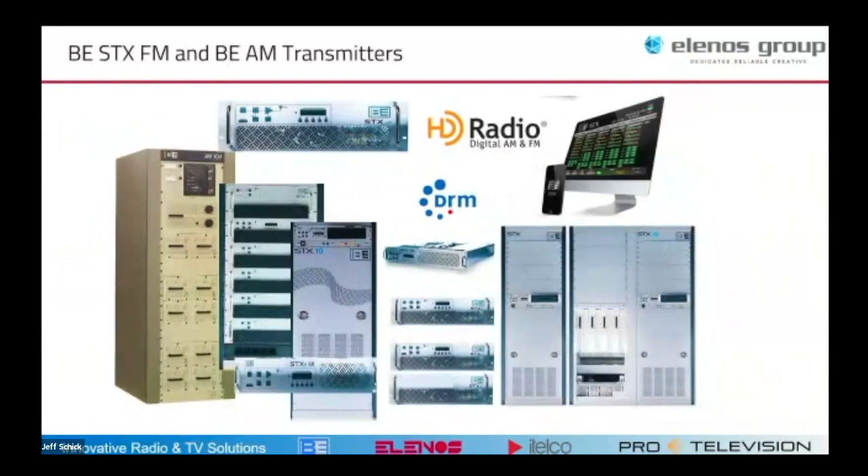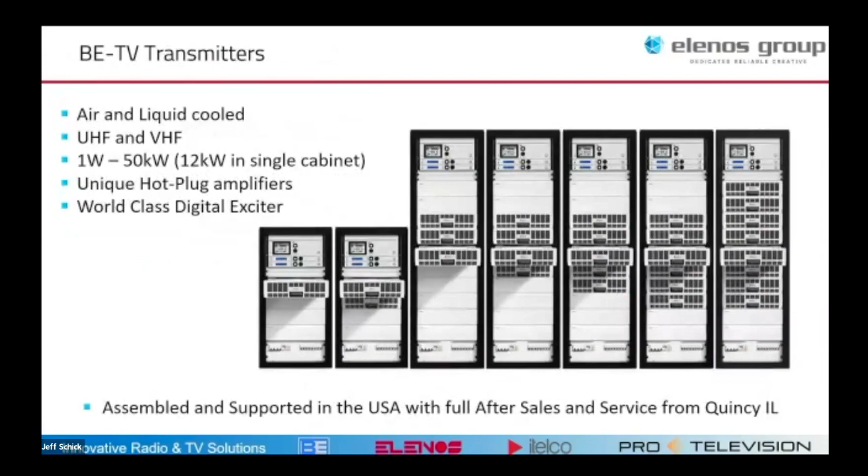So, BE product line, like I mentioned, AM, FM, and now TV transmitters made in Quincy, Illinois, and Audio Vault and other software products. We have News Boss, a product called the Radio Experience for data management. And then we've had some good success here in the U.S. with the compact Elenos line of radio transmitters. So everything from about 20 watts up to 30 kilowatts in more of a compact type architecture. And then TV transmitters, both air and liquid cooled, from 1 watt to 50 kilowatts. So really a pretty broad set of transmitters.

So the product we're going to talk about today is one we've called Quick Block. But before we really talk about the product, I kind of want to talk about transmitters in general, because over probably the past 30 years, as we've migrated from tube transmitters, solid state transmitters have kind of gone in two directions. Either there's a compact transmitter, you almost think of it as a big exciter. At some point, FM exciters were 10 or 20 watts, and now you might get a box that has the exciter in it, but it may have 1 or 2 or 3 or 5 or 10 kilowatts worth of amplification all in the same box. So that's kind of this mode of compact transmitters.

And then there are modular transmitters. So these tended to be bigger transmitters. You may have hot pluggable power supplies, hot pluggable RF amplifiers. For sure, there's an exciter. It might be a module or a 2RU box. And each of them have benefits. The compact transmitters generally are pretty efficient. They fit in a small space. They're cost effective, operate with pretty good efficiency.

But there are some drawbacks of them. And the modular transmitters, well, the great news is it's easy to swap out parts. And if you have a soft failure because one little piece fails, you're still going, but at reduced power. There's a number of other points. But generally, when we looked at Quick Block, we tried to say, what are the good things that our small transmitters are great for?

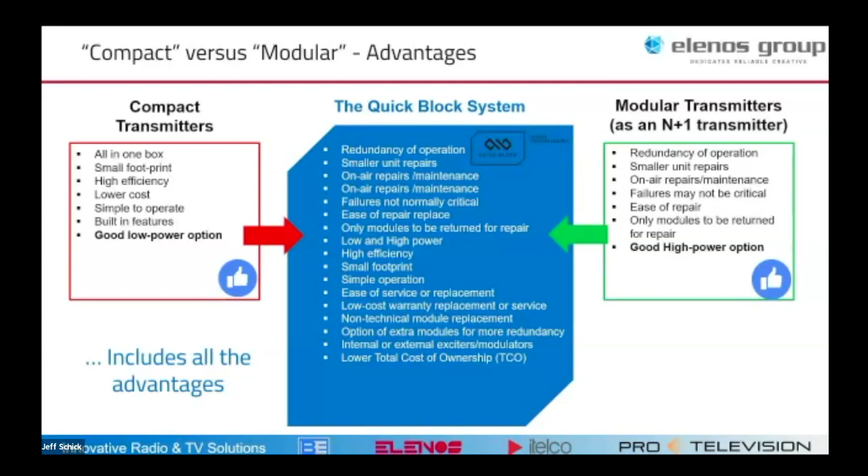So when we went down the path to develop the new transmitter, we tried to take the things that were not so great and move them outside. So what we ended up with was trying to get rid of things like single point of failure, making repairs requiring you to take the unit off the air, a limited amount of footprint, and things that would impact your cost, like shipping back a module. In some cases, you have to be a weightlifter to take a transmitter module, put it in a big box and send it back.

The idea was to make things small and easy to use that you could send in a FedEx box almost anywhere. So at NAB, we launched a product called Quick Block. The idea being that it's simply a case of building blocks that allow you to get to high power levels, but that you use the same fundamental pieces from a couple hundred watts up to 50 kilowatts.

And so the point is that it's modular, but modular not just in the sense that you can pull out modules, but, as we'll step through this, modular in the sense that maybe I started at a 10 kilowatt transmitter and then I needed to upgrade power. The combiners are modular, the frames are modular. So everything is a combination of the same pieces, a little bit like a building block kind of scenario.

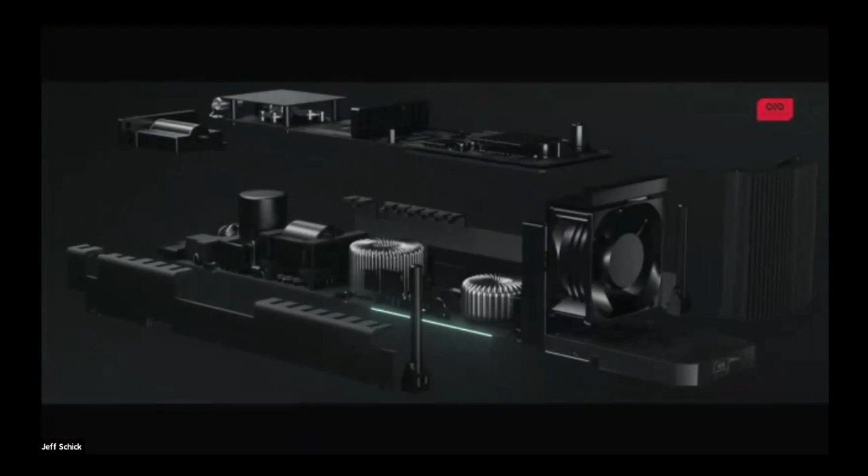So you can kind of look inside. Power supplies built into the bottom, fan cooling on the front, amplifier and control at the top, low pass filter at the module level.

Well, I guess the music's cool. It seemed like it might be a bit much.

So anyway, the point simply is that as we take a look at this, the idea is to make it so I don't have subsections of the transmitter all the way through the chassis. Everything's included in the module. So the amplifier module is very small, it's about 3.5 inches wide, 5 inches tall, fits in a 3RU chassis, and I'll show you an exploded view on the parts that are in there.

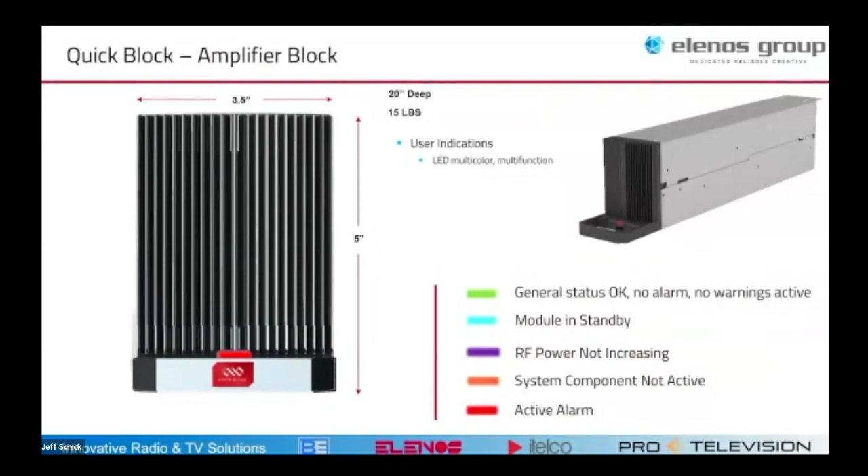But from a simplistic operation, from the front, there's a multi-status LED, so I can immediately tell not only is there an alarm; it's not simply red light, green light. I get a few other colors that can tell me what some of the general directions of issues are. So if I'm running a transmitter with 20 modules in it, I can easily pick out where and what type of situation there might be on that module. The controller, you can look at each of them and get more information, of course.

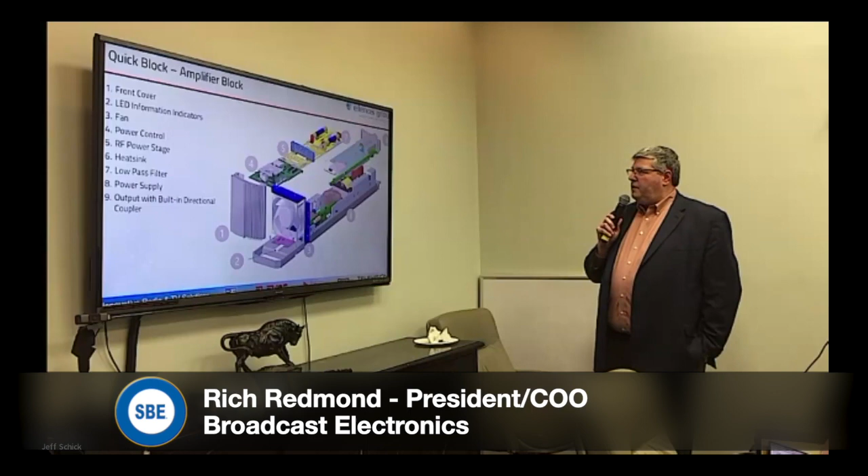So here's a bit more of a static display that I was talking about. But if we look at it from the very front, number one, there's an extruded cover. Now, while, yeah, it is kind of stylish and looks cool, the cooling mechanism is designed right from the beginning. So the fins on here are actually like the leading edge on an aircraft wing, and they're designed to guide the airflow so it flows evenly through the module, because they're all kind of angled a little bit.

And the fan, accessible for easy repair. It's got a little umbilical that plugs in. You take the 4 screws out and you can pretty quickly change the fan. On the bottom is the switch mode power supply. So this is one that the company's been building for some time. So it is repairable. It's not a, you know, off the shelf, this brand or that brand supply, along with the heat sinks.

The top plane, so when we jump up to number 4, we've got a little bit of control circuits in there that provide protection for the power control. So there's some RF drive and some smarts that help with VSWR foldback. We go into a single amplifier using LDMOS devices today.

And then you can see the thing that's blue with some like Swiss cheese holes in it is actually a clamp. So not only does it make sure that the device has got even pressure to get to the heat sink, which is under that. In this case, the heat sink has been removed from the drawing, so it's easier to see everything. But also it provides some surface area for heat to be extracted out of the top.

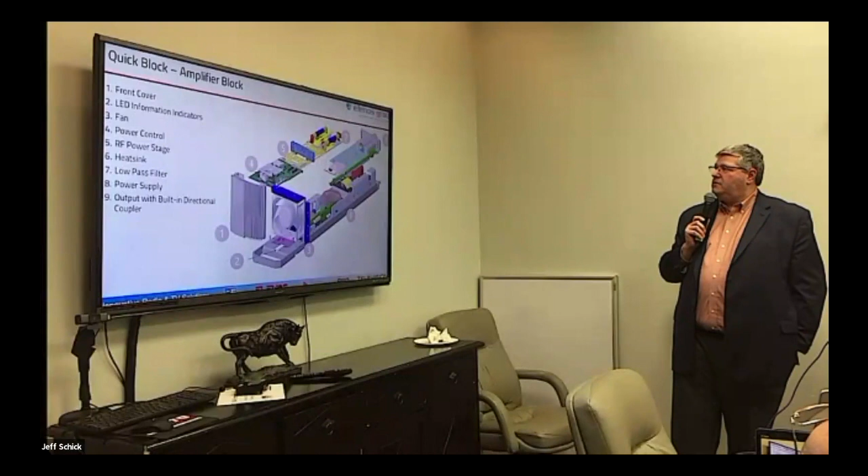And then the devices at the back in number 7 are the low pass filters. So one of the things that we found is, think back to tube transmitters, right? You always had this big section at the output that was the low pass filter. And then solid state transmitters, you tried to pack them inside. Well, that creates a single point of failure. So if you have any issue in the harmonics, there's only one thing that can filter it out.

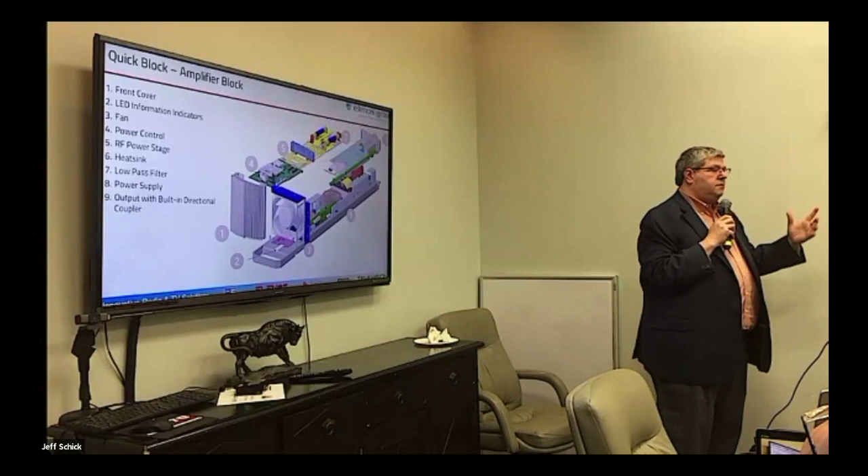So we can actually create much better filtering by doing it at the module level, so that as you stack up the transmitters, you don't have to have a 5 kilowatt low pass filter, a 10 kilowatt low pass filter, a 30 kilowatt low pass filter. They're all the same, and it's done right at the module level. So not only do you get better suppression, you actually have less loss because you're not sending nearly as much power through, so you don't dissipate as much heat. And what's the enemy of electronics? Generally, it's heat. So we keep the thermals managed quite nicely.

And then the output of every module, each module does around 1.5 kilowatts, is a machine blind mate, like 7/8 UHF connector at the back that plugs into the combiner. So those are the parts inside each module.

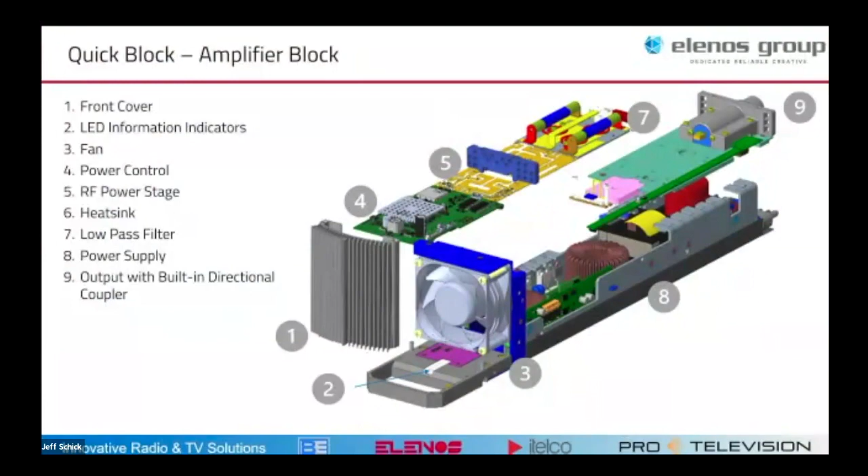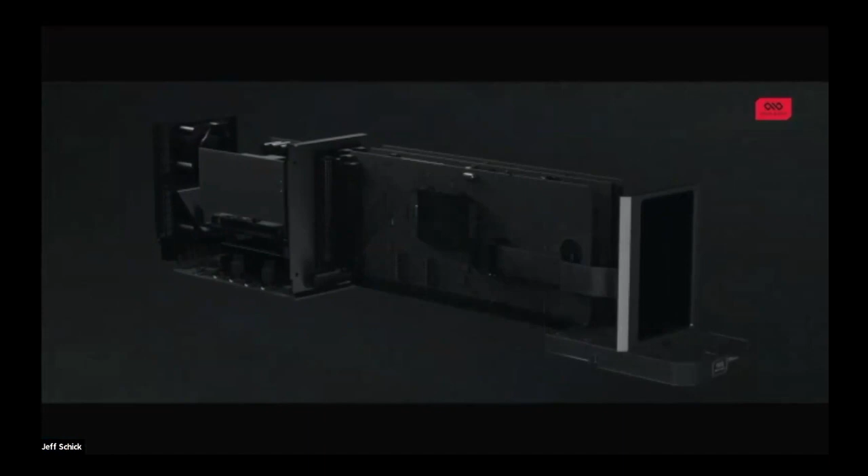The controller module, or the CCU, ends up holding, in the most compact versions, a controller, redundant exciters, redundant power supplies, and dual driver amplifiers, all inside this totally removable module. So not only are there slots that you can open up to take the different modulator and controller card out, the whole module is replaceable. If you think about it, in a lot of transmitters, the main transmitter controller is a board tucked inside that might be on a sidewall or a door. This makes it a little bit easier to move that forward and make it replaceable.

And it's got dual cooling fans at the back. So there's not very much heat in here because there's about 50 watts of drive is all that comes out of that device.

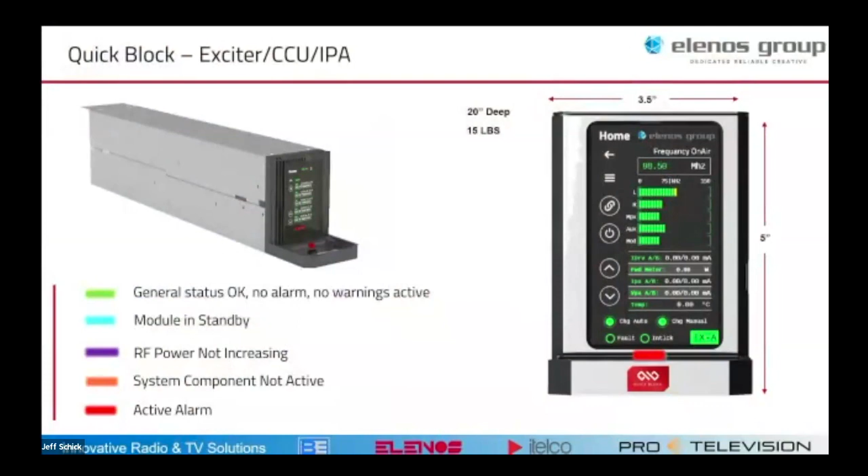So when we talk about the CCU, command and control unit, it includes the exciter, the controller, and an intermediate power amplifier. Again, we've got the same multicolor LED on the front, so if there's a fault, you get a quick idea of where it's at. And then we have an iPhone type touch screen on the front that can go through different pages; this one happens to be looking at the audio inputs. So we're seeing left and right, MPX, aux, modulation level. And there's automatic switching in there for failover and so forth.

And then you can page through other things with the different voltages. But again, same size, 3.5 by 5 inches, pretty compact. Now here's a static exploded view. You can see number one's the front door that I was mentioning. It tilts open and that's got the touch screen on it.

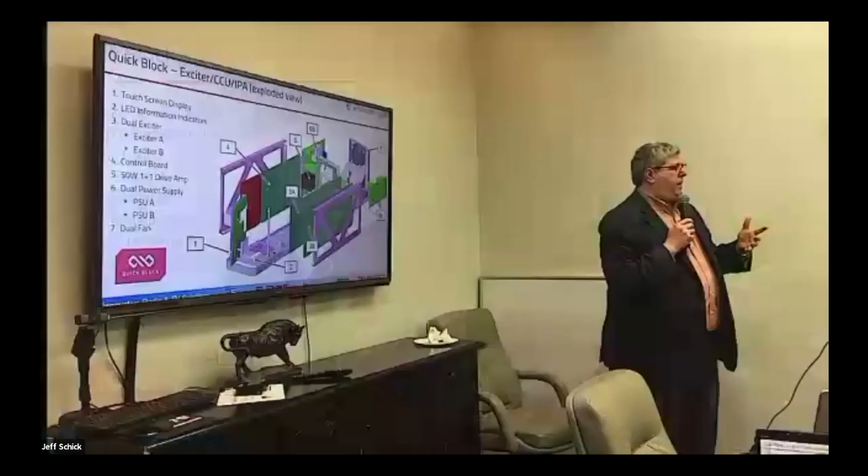Number four is a controller. And really, because there's control in each of the amplifiers for protection, it's more kind of like an arbitrator and transmitter level controller, meaning that it brings up information, it presents the web pages, and provides some high level control, but the transmitter can operate without that at safe power levels that the modules manage.

3A and B, those can be dual exciter cards. And then we have the dual power supplies in 6A and B. And then number 5 is actually a 1+1 drive amplifier, so we have redundancy there. And then 7, we have dual fans at the back. So the goal was to not have really any single points of failure, the best you could make it.

And then also make it so everything was hot pluggable and easy to swap out. So it's not like you need to stand on your head to go get some mid plane out of the middle of the transmitter. Pretty modular. Rich, yeah, Bud. Is that module containing memory and all of the settings for the whole transmitter at that point?

Yeah, so there's some non-volatile memory in there. Now there are some of the protections, Bud, when I mentioned at the module level, the fast VSWR protection and over temp and all that, that gets managed in the module. So it's not like if you make a controller change that you somehow need to sit down and program each of the modules again. But things like the APC control and whatever you set, if it's a 5 kilowatt transmitter and you're running at 3.5, that memory is in there.

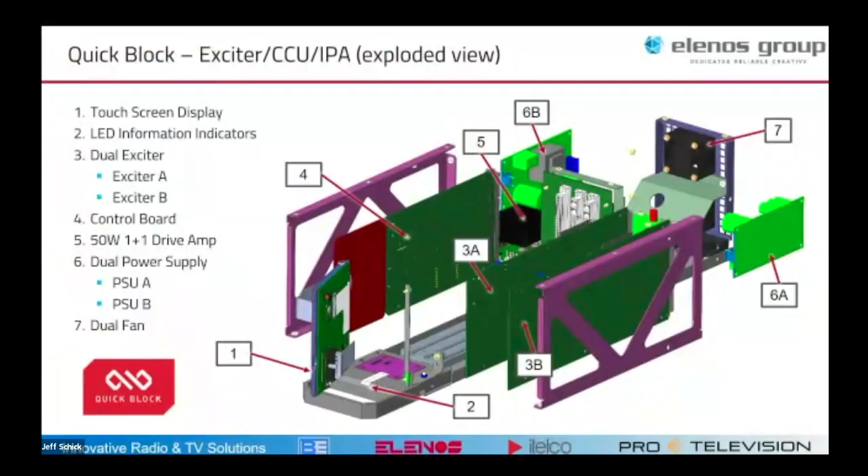Now, if you do program your stuff in there, it should swap over pretty quickly. But if I'm not mistaken, you hit the button to turn it back on, because I think the front panel, when you pull that controller card out, needs a quick reset. But basically, it's all pretty quick. Well, it's not all that complex.

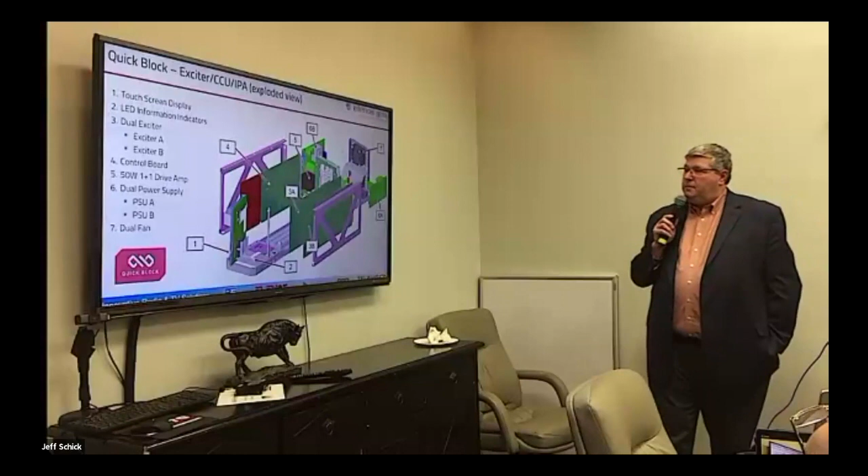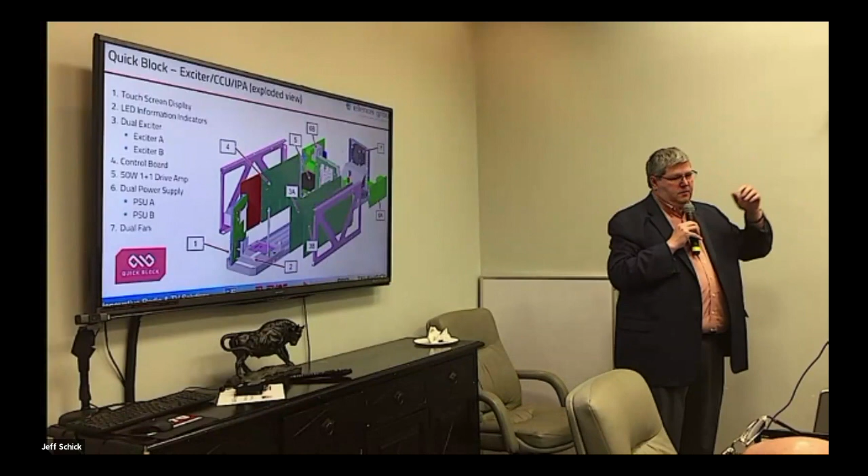And did I see on the meter, you have discrete audio on there too? Yeah, so the input can be composite or left or right or AES. So the meter, there's a couple of inputs on there, and there's some input switching. So if you had composite coming from an Optimod or an Omnia or something, and you had backup audio coming in, you could use

there's a kind of simple audio processor in there that gives you some basic audio processing. I guess if you were in a not super competitive market, it might be okay to be your main processor, but it's really more designed to be a backup. So it's not a CRL inside?

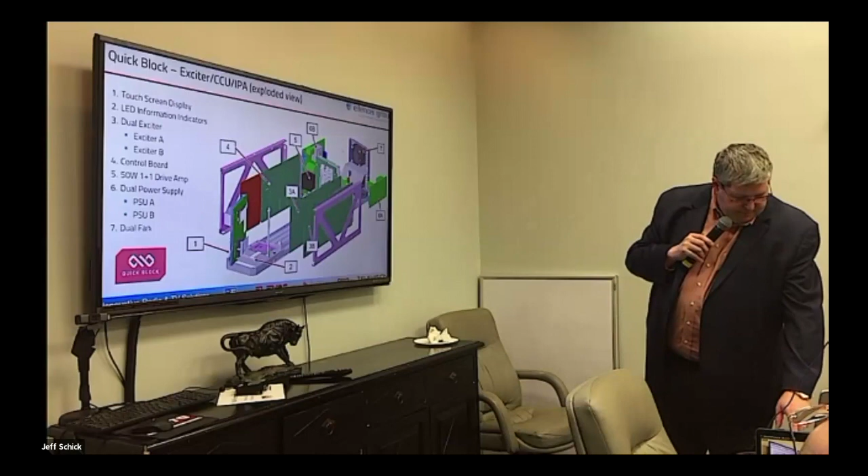No. I mean, I suppose you could dink with it and make it sound poor like that, but for anyone who's been around 100 years ago, CRL, a friend of mine told me, was for cymbals really low because it didn't have very much high end.

So yeah, if you look on the left, you can see those are the meters for the input: the left, the right, the MPX input or composite, an aux input, and then the modulation level. And then the menus are kind of finger-specific size where you can jump to the different sections and either set a power or make some adjustments.

You see the 3-band on the fourth tile over on the right. There's just some basic adjustments on the 3-band processor. So I guess whoever set this up thought the high end needed to be really shrill, or I don't know, maybe they have too much bass. But anyway, it's a pretty simple tri-band processor. If I was guessing, it would probably be in an 8100 kind of ballpark, something of that ilk. It's not a hot rod processor by any stretch of the imagination.

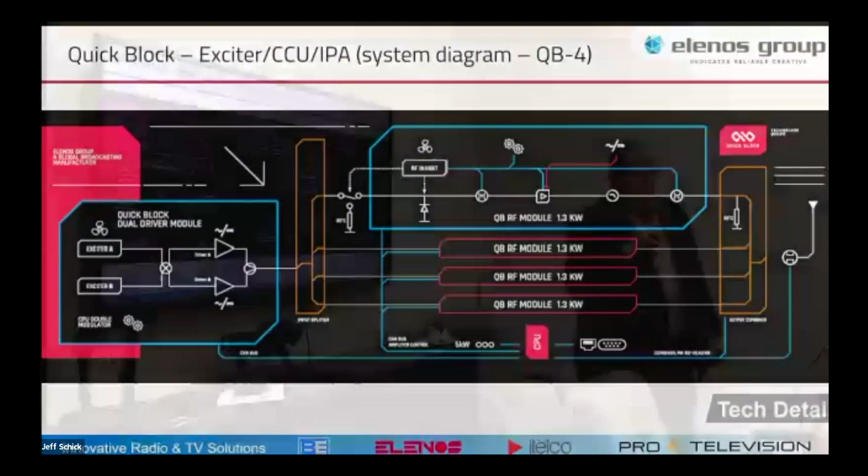And so if we have more chassis, we keep stacking. Like I said, there's really only a couple modules. You keep stacking them up. If you need a 10 module transmitter, it's 2 of these 3RU chassis that stack up, and if it's a 15 module transmitter, there's 3 rows. To the left is the block diagram of what we call a QB4 because it's 4 modules. It has the 4 amplifier modules, does 5 kilowatts, and has the control and exciter. The QB9 does a little over 10 kilowatts.

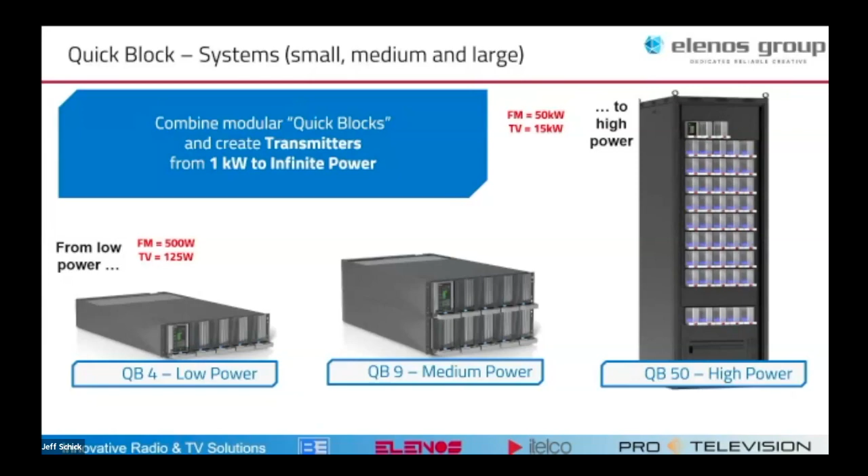And then we stack these up in a rack with frames of 5 PA modules across in a 3RU frame. And then there's a combiner and splitter in the back. I think I got some pictures to show that. So we can do up to 50 modules in a single 19-inch rack. So pretty power dense. And frankly, it's more for HD radio operation that you need that much amplification, not that you're really running 50 kilowatts for an average station.

So here's an exploded view of the frame. The modules are what we just talked about. You can see to the back, I think number 4 is pointing at it, this is the combiner and reject loads. Those are the machined blind mate 7/8 inch EIA connectors that go into the combiner. The combiner's in a machined chassis on the heat sink. So there are no cable combiners here.

Some products have cable combiners, which are easy because you can take the precise lengths you need to combine and coil them up or make them fit in a small place. But over time, we've all had transmitters with cables, right? After a while, they dry and sometimes crack. So these are all laid out and machined inside the aluminum box. The back of the frame, this one shows one that has the audio inputs. You can see the number 5 points to the back. The primary AC connection comes in there.

And then number 7 is the control board that's in the frame. So Bud, when you were asking about control, there's some that lives in each module, and then there's a communication port on each frame so that if you're talking to the outside world, you know, that's where you might make connections for either parallel or SNMP or other logic, or if you're taking multiples of these frames, that's how they communicate to the display unit.

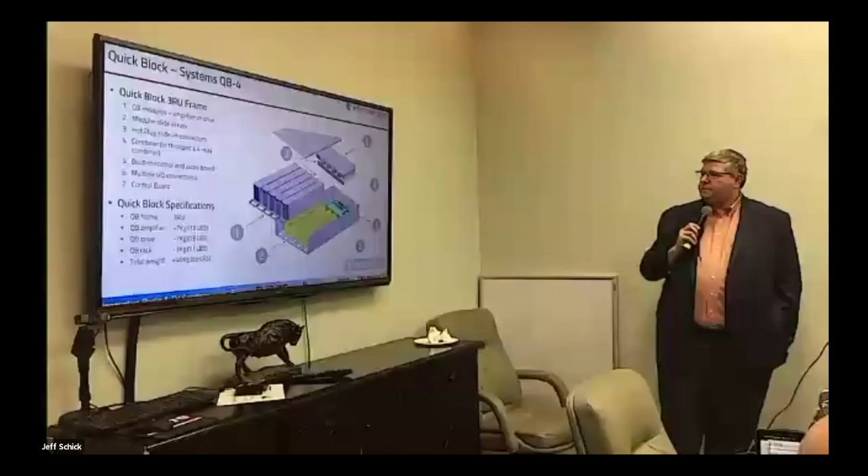So with it being modular, say for some reason you have a lower power or lower licensed power for a station, but then you're working on increasing power range. Are you able to take existing frames and add in more modules to get it to the proper powers?

Yeah, so it's a great question. So it comes down to the combiners. So in this case, number 4 here shows you a 4-way combiner, and you can kind of see there's a little blocking brownish color against the kind of purple. That's because the same size box can take a 5-way combiner.

So there's 2 ways to get there. I just press the button and turn the power up. Maybe I'm running 2 kilowatts today, but I think I'm gonna need 4.5. So maybe I buy a 5 kilowatt and I just run it a little bit lower and I raise the power. But more practically, when you get to higher powers, you could have 2 or 3 of these chassis and maybe be a 15 and you get a power increase.

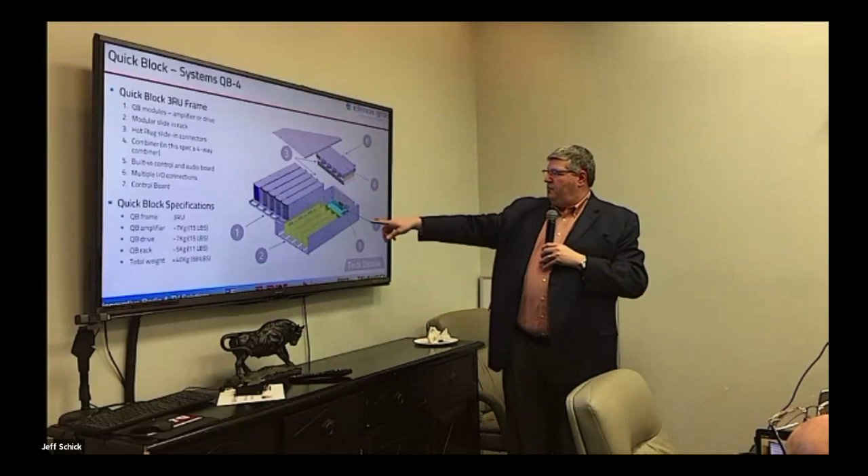You can add more of the chassis because the combiner that goes to the back that each of these frames plugs into is also modular and scalable. So it kind of starts and it stacks up in sections. So there's not a totally separate combiner for, say, 4 of these drawers versus 5 or 6. You're adding another section and it kind of stacks all the way up to the output at the top. Or conversely, you think of the output connector as the starting point and you stack sections on the back.

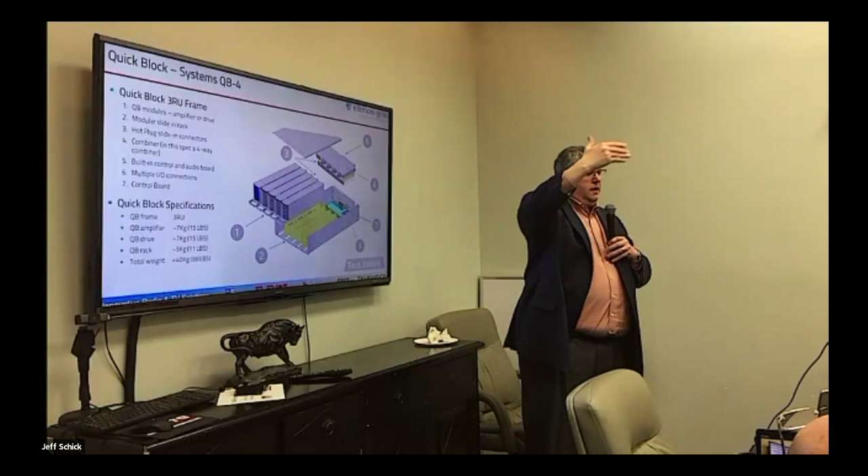So yes, you don't have to throw out pieces. Because with everybody's modular transmitter, you can pull a module out of a 10 kilowatt and put it in a 20. But 98% of the rest of the transmitter is different. It's a different frame, a different box, a different control system. In this case, it's all really the same. It's just how you set the software to go control it. So yeah, that's exactly the idea. Did that help answer your question a little bit?

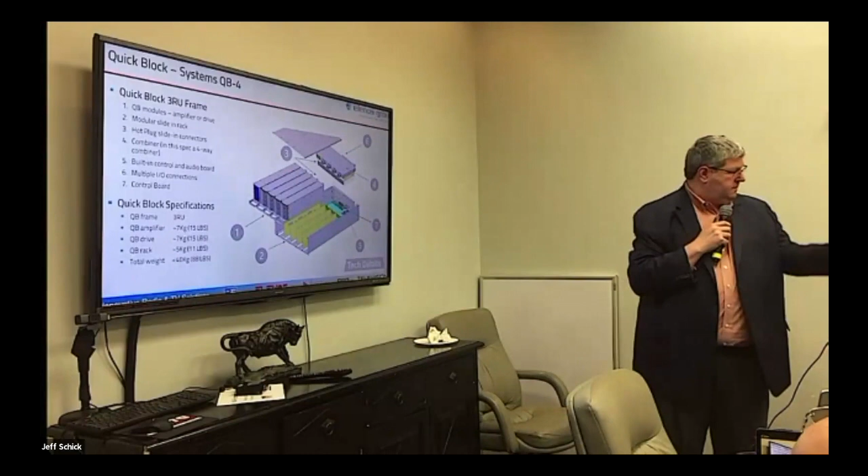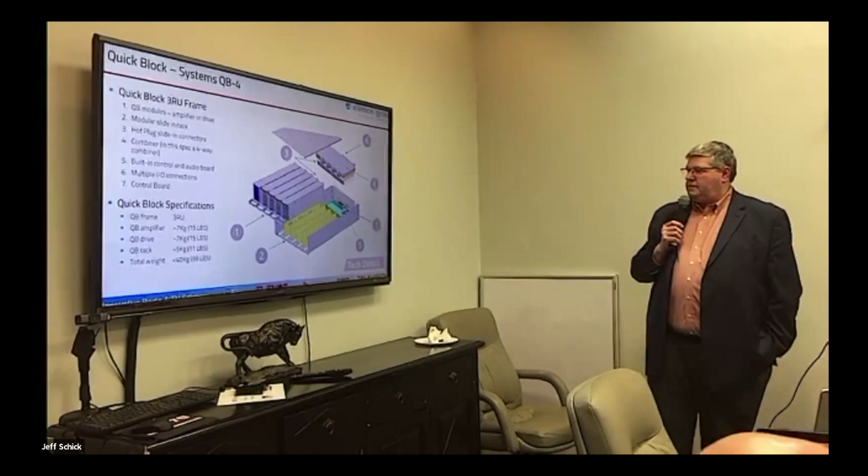Go ahead. I'm sorry, go ahead. Relating to that, in terms of reliability, suppose you have 5 slots there, is it? Yes. Suppose your power is covered by 4 slots. Could you have just an idle or standby module in the 5th one? And if one of the other 4 fail, then it would automatically change over to the 5th.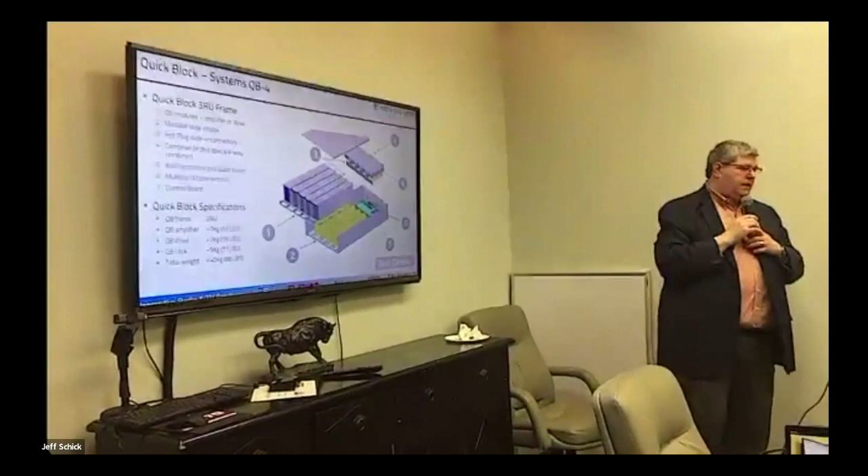Yeah, so that's a good question. So there's 2 ways that works. At some very low powers, we can actually do N+1 switching in this same rack. So since each module is a kilowatt, let's say you wanted to have a backup, right? Well, you could have an exciter controller, you could have 2 or 3 modules where you could actually do physical switching.

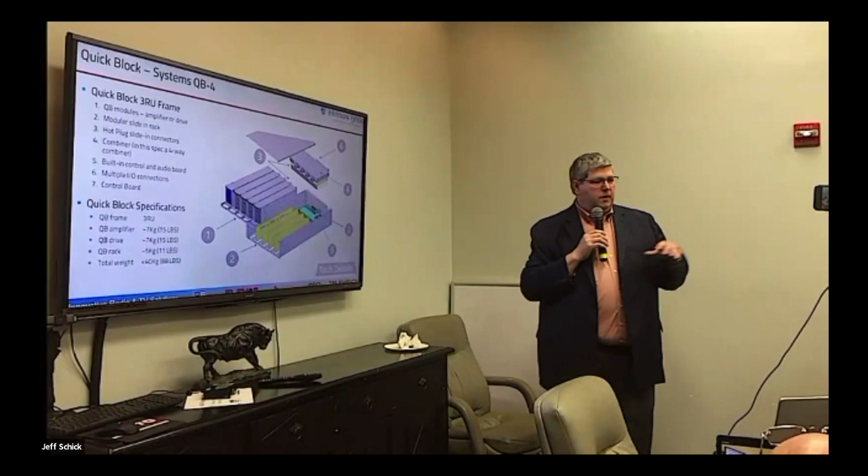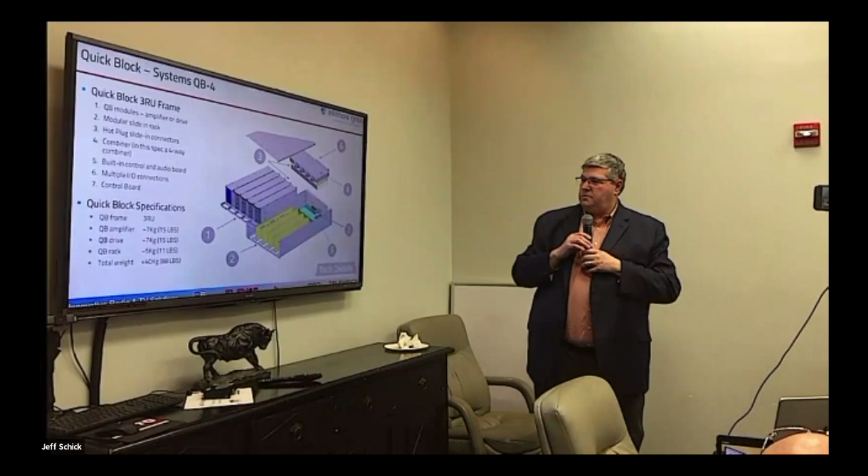The other way is, to your point, if I didn't need quite as much power, each of the 4 run, but they run at a much lower power level. And then if one fails, it turns the other 3 up to get to your power that you need. And it can do that across multiple frames in the same way. Because sometimes the switching makes sense when you need to switch the entire frame. But here's kind of what you were talking about: I may not need all of the power, so I really have the equivalent of an extra module in reserve.

Now, it's not like there's a patch panel back there and I'm moving cables around. It's really a case of I'm spreading the load across all the modules, and I can still maintain the power if one of them's failed because I've got a bit more headroom. And then you can go pull the failed module out and swap it out, or put it in a FedEx box and send it back for repair. If you do your own bench repairs, you take it to the bench. But again, the point on the repair that's kind of important is both the power supply and the amplifier and the controller are all in the module.

So, we've all probably had things where you pull a module out of a transmitter, frankly, including ones we've designed before and many of the others. Well, it's kind of useless because you don't have a power supply to turn it on, you don't have the controller to turn on, and you don't have any cooling. So then you kind of build this little fixture with fans and a power supply, and you try to fake out the controller. In this case, all of that's in there.

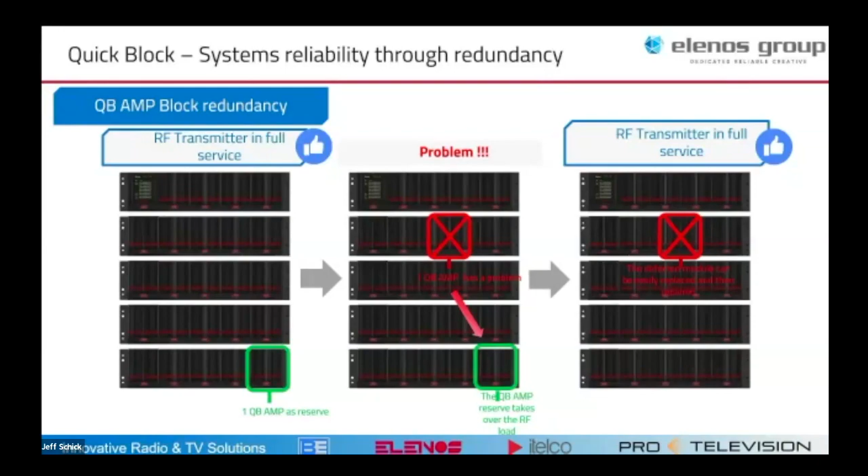So you can put primary power, 240 volts or 220 volts going into each module, and the control and the turn on and the cooling and everything's in there. So it's much easier to do repairs because it's almost like all the systems in the transmitter live in the module. They're not tacked on a back wall or fans on the back door. They're all in each module.

So here's a little bit of, yeah, go ahead. I'm Bud, sorry. So that would have like 4 connectors, let's say it's a 1 kilo box that you're buying, right? And that would be the exciter, controller, and one module? Yeah. Unless you wanted redundancy.

And then there is an option if you wanted to have two amplifiers, you could do it two ways. You could do it with a switch where you switch the amplifiers. Well, that has a bit of an interruption because you've got a physical travel of a switch. Or you could kind of size it as a 2 amplifier. And then if you lost something in it, the other one makes up the difference. So then that combiner on that back plate, would that only have like 2 ports on it? Yeah, good point.

And then what happens if you grow it from a 2 module up to a 4? Yeah, so in this frame, the purple kind of color here that has the blue 4 modules, there's a stamped out piece of metal that's the combiner inside. So, you could either change the piece inside, or probably the easier thing would be to change section 4. We just get a different combiner, do an exchange, but the parts are the same.

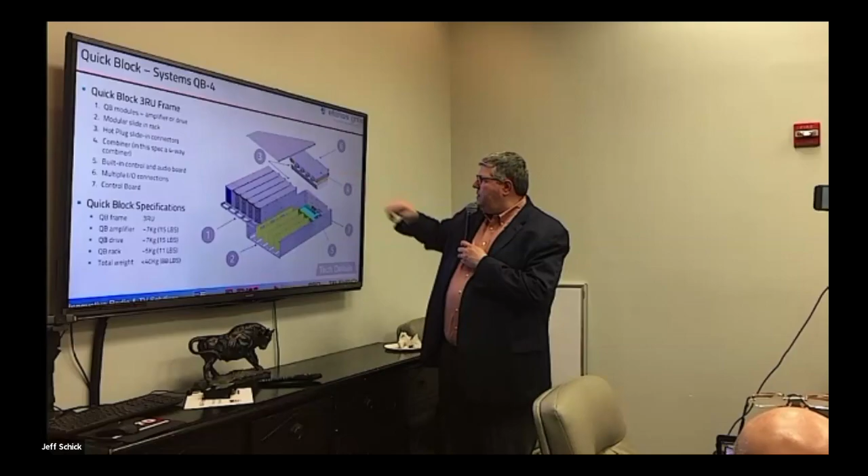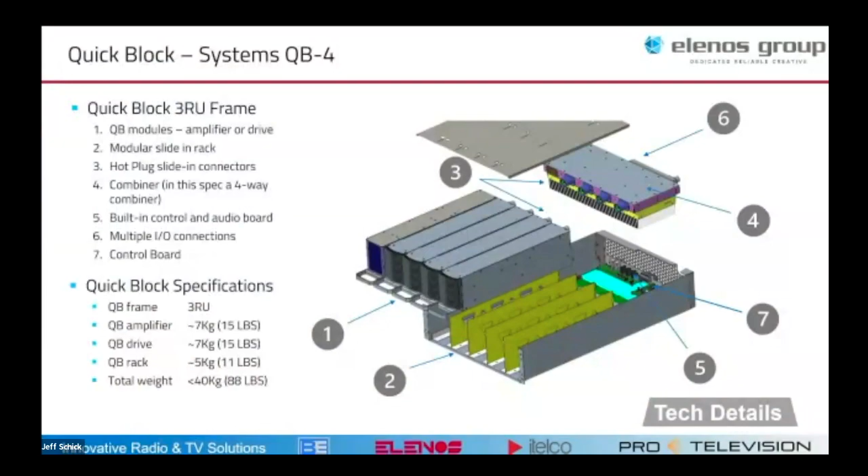But there's a reject load for each port on the combiner that's on the heat sink. So the little slanted thing below the yellow is the heat sink. And then up to 4 inputs are on it with a single output on the back. So, there is something to change, but it can be either done at a kind of block level, if you will, or a module level, Bud, or you could change the piece inside, which is the combiner. Frankly, it's probably a bit easier to just do an exchange on the assembly number 4.

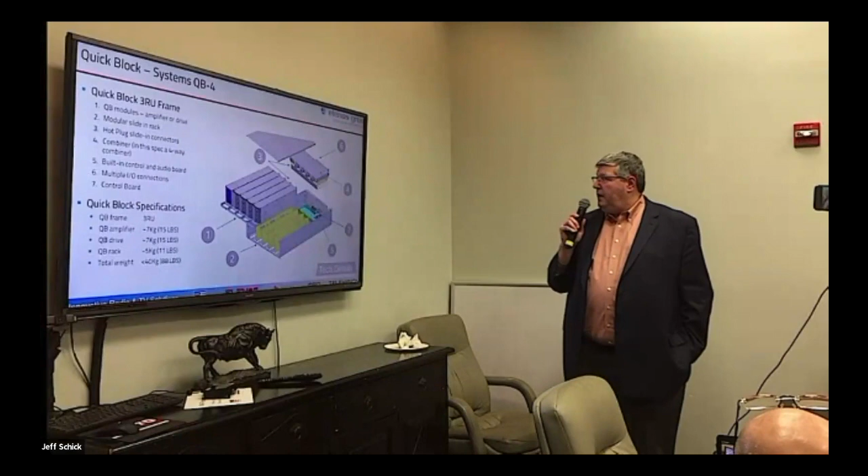And what's the output? Is there a picture of the output? Yeah, I should be able to get to that. As you can tell, I'm very interested in this product.

Well, you're reciting all the questions I sent you, so thank you. I haven't checked email since about 2. Sorry, I was being a smart.

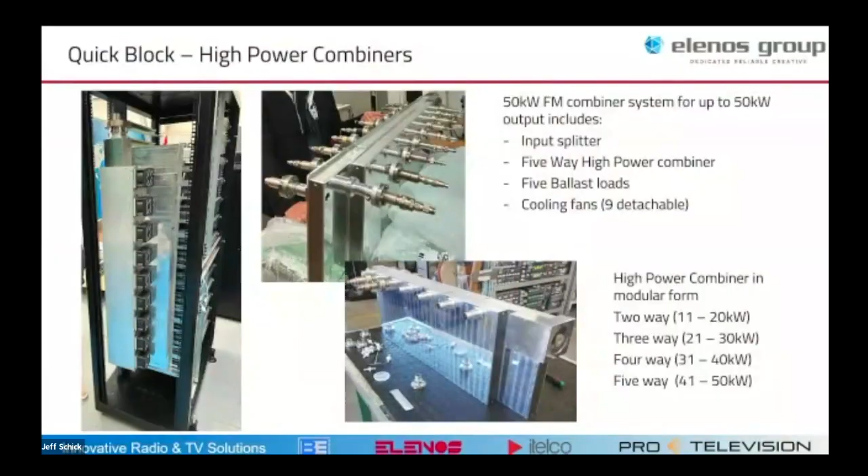Interesting. A standard Middle Atlantic rack, or? Oh, yeah, I don't know that it's specifically Middle Atlantic, but yeah, it's a standard 19-inch rack. Good question. It's a little bit deeper, so I think they are like 36 inches deep or so. But it's a standard 19-inch rack. For ventilation purposes, you'd probably want a dedicated one, but theoretically, if you didn't have as many, you could put other stuff in it. So if you had a 10 kilowatt transmitter, which would be 2 rows, you have plenty of room to have an STL or something else.

And generally, while you can't quite see it here at the top, there's a spot for a cabinet flushing fan. So there's a fairly large fan that helps flush air through the box as well. But the cooling of the modules and the PAs is actually done all in each module.

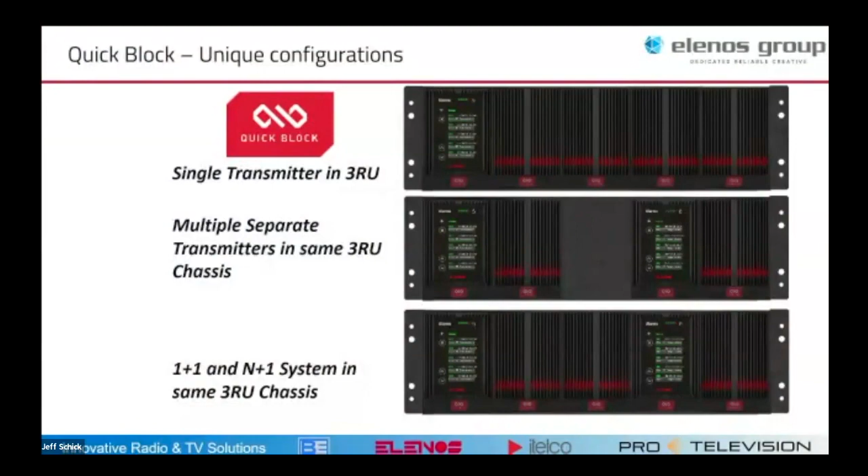So frankly, those kinds of configurations tend to be more popular in places in the world where one company runs a whole bunch of radio stations, like somebody who runs all the BBC radio stations where they've got BBC 1, 2, 3, 4, 5, 6. You might want to have something like this. In the US, it's a little less common because we don't have as many consolidated sites with everybody running about the same power. Our network planning is a little bit different, but the capability's there.

I'll skip over that. There's some control. So anyway, that's kind of a high level on the transmitter. I'm happy to go back and dig into anything specific that you guys want to have more questions on. Are parts proprietary, or replacement parts for the modules, things like the box fans? No, they're generally off-the-shelf stuff. So the RF devices you can buy from anyone. Things like the actual circuit boards, okay, it's a circuit board made for that design, but the components are off the shelf.

Now in the switch mode power supply, there are a couple of coils that are specifically made, but generally all the subcomponents, you can buy most of it at DigiKey. Our intention is to make it easier to repair, in part because we kind of have two paths. One is if you don't have people who are technically inclined to do that locally, we want to make everything modular and easy to put in a box, so it's not this huge thing you're trying to send. In fact, the objective was, I want it so it can go in a FedEx box and you can send it anywhere in the world in a day or two, and that it doesn't have to be someone technically competent to grab the module.